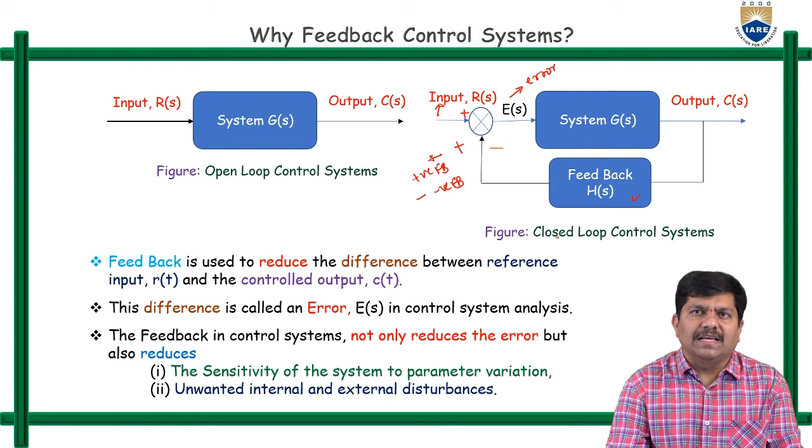So, what about the parameters that will be varied? The effect of parameter variations we can study in open loop control systems as well as in closed loop control systems. Similarly, sensitivity in open loop and closed loop control systems. Next is the effect of feedback on overall gain, effect of feedback on stability, effect of feedback on time constant of the control system. Last one is effect of feedback on disturbance. The disturbance could be an internal disturbance or external disturbances.

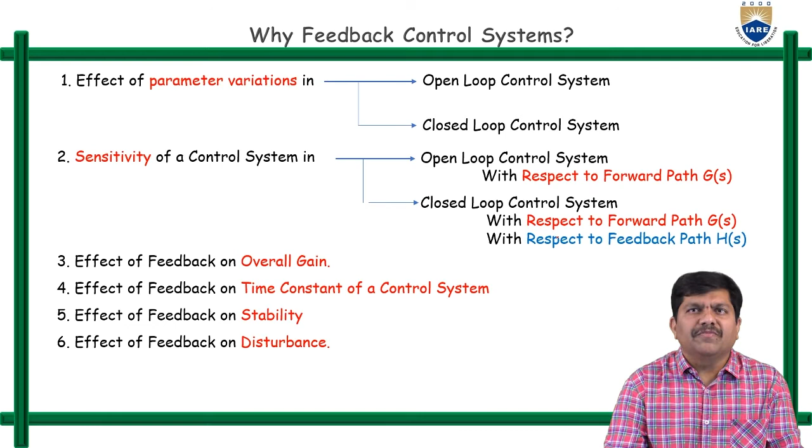These are the 6 important variations we can observe, and these are the 6 important parameters that will be affected once the feedback is connected. So if they are affected, how effectively will these 6 parameters be varied in closed loop control systems? So first, let us see the effect of parameter variations.

Now, we are going to discuss the effect of parameter variations, because if we do not talk about open loop control systems, then we cannot establish a perfect relation for the characteristics of the feedback system. Feedback is the section that separates open loop and closed loop systems. So let us examine these 6 parameters for open loop systems and closed loop systems. Once we do that, only then can we establish the perfect relation, and that is the effect of the feedback section on these 6 parameters.

So first one is parameter variations. What are the parameters that will be varied? We are going to examine that for open loop and closed loop systems. So first, let me examine the open loop control system. In the open loop control system, R of S is there and C of S is there. R of S is the input, and the forward path system transfer function is G of S. On the left side I am giving R of S, then G of S, and on the right side C of S.

Suppose, due to some internal disturbances or some parameter variation, take a transformer as an example of an electrical section. Because of variations in temperature, if it is kept during peak summer, the transformer has to withstand 53 or 54 degrees centigrade, based on geographical constraints. If the same transformer is placed in winter, it need not address that much temperature. So because of temperature variations, moisture, rainy conditions, or seashore conditions, so many constraints are there.

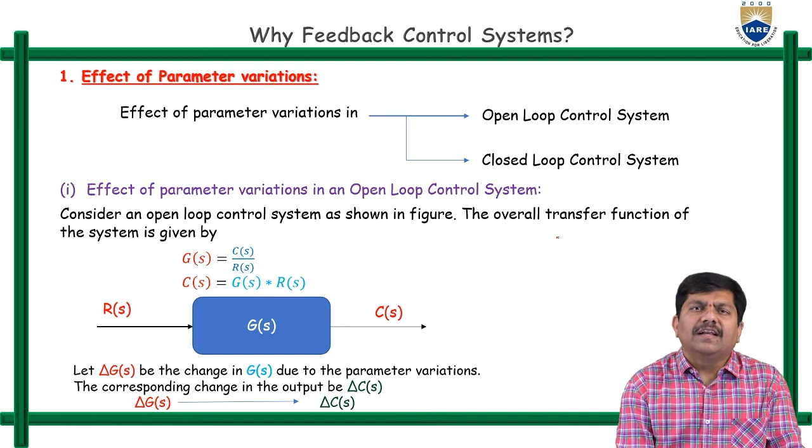Delta C of S is because of, not exactly proportional to, the parameter variations in the forward path transfer function, that is delta G of S. So that's what here we are clearly mentioning. Delta G of S will make the change in output as delta C of S.

So first, the effect of parameter variations can be observed as follows. We know that the Laplace transform of the output is nothing but the transfer function into the Laplace transform of the input. So let us make use of the same concept here. What could be the overall output once the parameter variations have taken place?

The output is C of S plus delta C of S, which is the transfer function, G of S plus delta G of S, into the input R of S, because the input won't change; the parameter variations have taken place in the system, not to the left side of the system. On the left side R of S will be there, but in the system it is G of S plus delta G of S. So only from that system onwards the parameter will be varied, and the corresponding consequences will change.

So the output will be changed from C of S to C of S plus delta C of S. C of S plus delta C of S is equal to G of S plus delta G of S into R of S. Simplifying that, C of S plus delta C of S is equal to G of S into R of S plus delta G of S into R of S. On both sides the common terms can be cancelled. The remaining one is delta C of S is equal to delta G of S into R of S. So what do you mean by that?

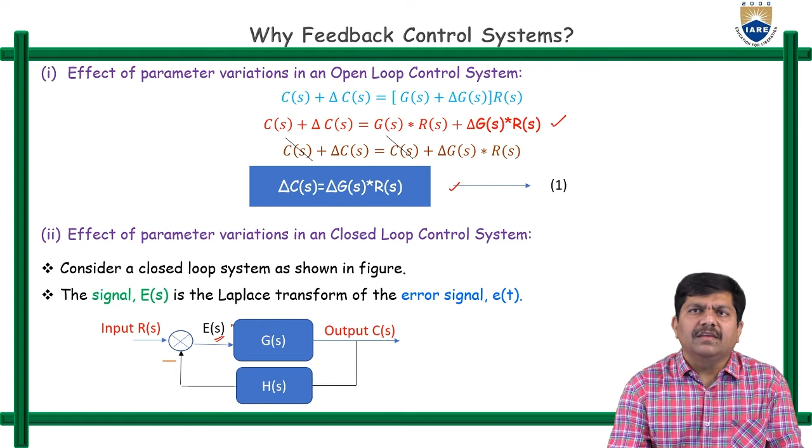The second one is the effect of parameter variations in a closed loop control system. Consider a closed loop system with G of S and H of S; the output is C of S and the input is R of S. The additional quantity here is the error, E of S. The overall transfer function of the system is given by C of S divided by R of S equal to G of S divided by 1 plus G of S into H of S.

This is the overall transfer function if the closed loop control system is assumed as a negative feedback control system. In the total analysis we are going to consider negative feedback control systems only. So in negative feedback control systems, the overall transfer function C of S to R of S is equal to G of S divided by 1 plus G of S into H of S.

So what are the variations? Let us introduce the variations in the forward path transfer function. So the proportional variation in the output is C(s) + ΔC(s) = [G(s) + ΔG(s)] / [1 + (G(s) + ΔG(s))H(s)] · R(s).

Wherever G(s) is there, G(s) + ΔG(s) we have to add. So finally C(s) + ΔC(s) = G(s) + ΔG(s) divided by 1 + G(s)H(s), and in the denominator, if we are simplifying, ΔG(s)H(s), into R(s). So this ΔG(s)H(s) is a very small value as compared to 1 + G(s)H(s). So as compared to this particular value,

now ΔG(s)H(s) could be ignored because ΔG(s) is a very small value, and if H(s) is multiplied, that value becomes further negligible. So in other words, to simplify our assumptions, ΔG(s)H(s) can be ignored. If it is ignored, then C(s) + ΔC(s) = [G(s) + ΔG(s)] / [1 + G(s)H(s)] · R(s).

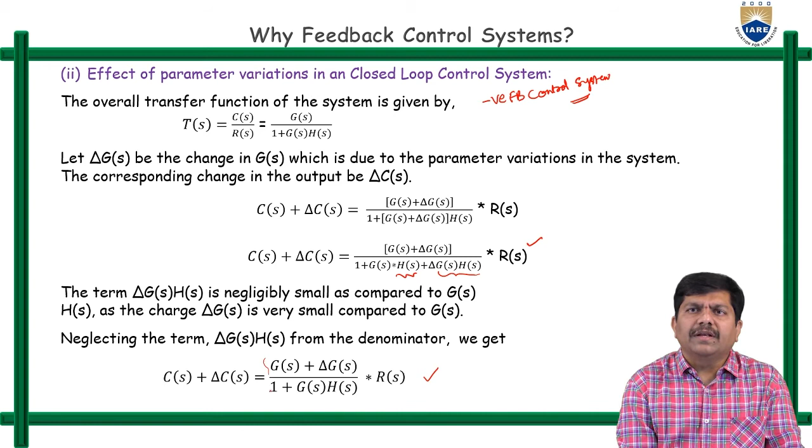So after ignoring this ΔG(s)H(s), the total expression can be reduced in a simplified manner, that is C(s) + ΔC(s) = [G(s) + ΔG(s)] / [1 + G(s)H(s)] · R(s). So again here, in the numerator G(s) + ΔG(s) is there. So you can separate G(s) as a separate term and ΔG(s) as a separate term. That's what we are doing here.

So C(s) + ΔC(s) = G(s) / [1 + G(s)H(s)] · R(s) + ΔG(s) / [1 + G(s)H(s)] · R(s). So this first value is finally actually the C(s) value. This is C(s) + ΔG(s) / [1 + G(s)H(s)] · R(s).

So on the left side and right side, there are some common terms. If you cancel that term, the left side is ΔC(s) = ΔG(s) / [1 + G(s)H(s)] · R(s). So this is the output corresponding to the internal variations, parameter variations, in the closed loop system.

In the open loop control systems, if you observe, ΔC(s) is just ΔG(s) · R(s). This is what happens in the open loop control systems. In the closed loop control system, the same ΔC(s) = ΔG(s) / [1 + G(s)H(s)] · R(s). So what do you mean by that? Closed loop variations equal open loop variations divided by 1 + G(s)H(s).

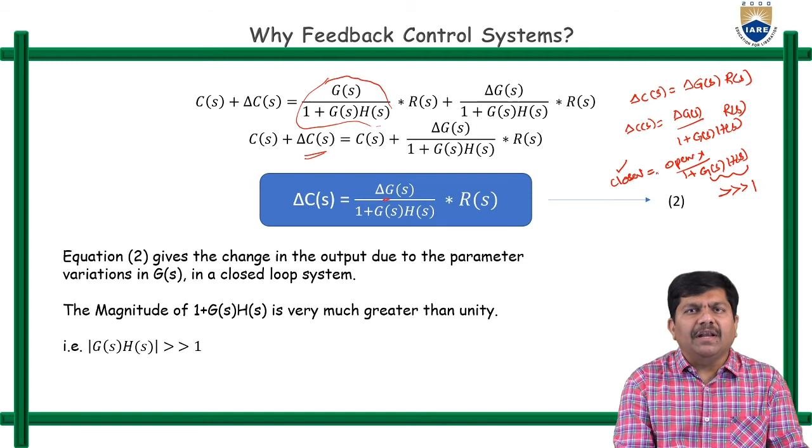So which one reduces the impact of variations in the output? No doubt it is the closed loop control system, because the open loop variation is divided by 1 + G(s)H(s). Generally G(s)H(s) is a positive value, certainly very much larger than 1. So open loop transfer function variations divided by a very large value gives the closed loop control system. So the impact of system variations on the output in the closed loop control system is very negligible. This is a better feature that the closed loop control system has.

Now here the observation is clearly just what we have described: delta C of S is equal to delta G of S into R of S in the open loop control system, and in the closed loop control system, delta C of S is equal to delta G of S by 1 plus G of S into H of S, into R of S.

From equations 1 and 2, in a closed loop system, due to feedback, the change in the output due to the parameter variations is reduced by a factor 1 plus G of S into H of S. In an open loop system, such a reduction does not exist due to the absence of feedback. So this is a very important observation, and this is the effect of the feedback component on closed loop control systems.

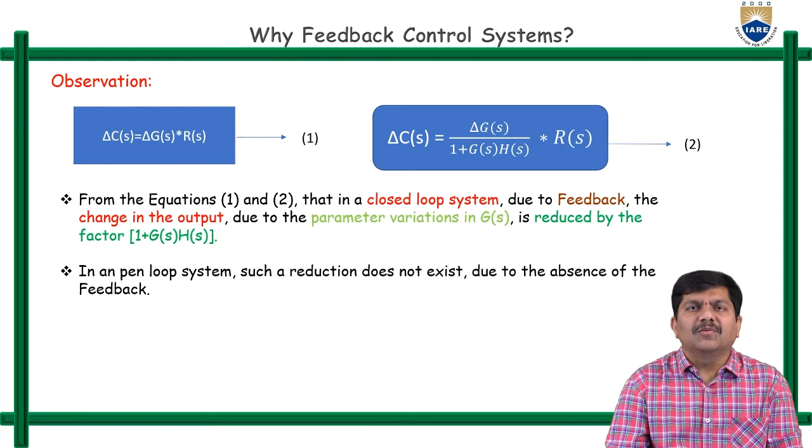Now, the second important quantity is the sensitivity of a control system. First, we should ask: should sensitivity be maximum or minimum for betterment of the system? Sensitivity should be minimum, because if the sensitivity is too high, for smaller deviations or smaller inputs the system behaves like anything. Is that property advisable for the healthy conditions of the system? No way.

So if the sensitivity is very high, such a property is not advisable for any existing system. Generally, sensitivity can be defined as percentage change in transfer function to the percentage change in any one of the parameters. The parameter with respect to which we want to assess the sensitivity of a transfer function should be in the denominator. Sensitivity cannot be defined for only a single parameter. Sensitivity means with respect to what? Because sensitivity can be defined in so many ways.

The system is so sensitive with respect to temperature, not that much sensitive with respect to moisture or some other conditions. So the relation between the two parameters is very important; only between two parameters can sensitivity be addressed. Sensitivity of what, with respect to whom? So sensitivity of the transfer function with respect to the system parameter, defined as percentage change in transfer function to percentage change in the parameter, which is K.

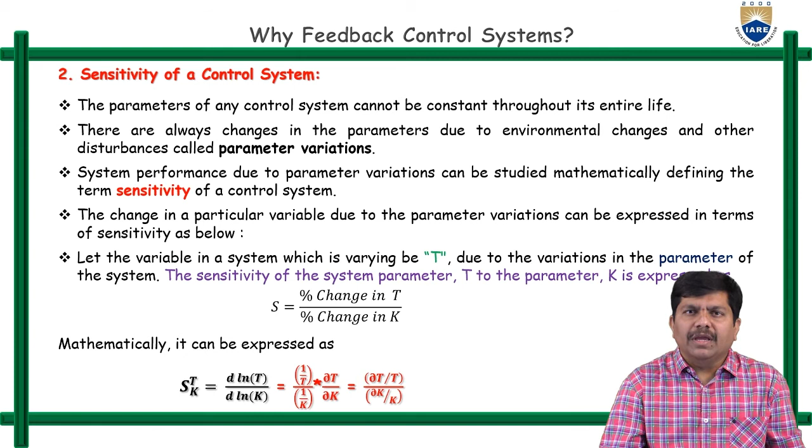Mathematically, percentage change in transfer function is dou T by T, the change in the transfer function divided by T. Why T in the denominator? Because it is a percentage, otherwise dou T is enough. Percentage change in K is dou K by K. Adjusting numerator and denominator, sensitivity can be represented as dou T by dou K into K by T. This is the introduction to sensitivity, and the representation S T K is also called the sensitivity function of a system.

Let T of S be the overall transfer function of a control system and the forward path transfer function G of S vary. If we want the relation between forward path transfer function and overall transfer function, the sensitivity is S T G. In the superscript we write the quantity whose effect we observe, and in the subscript G, the parameter we vary. So S T G is dou T of S by T of S divided by dou G of S by G of S.

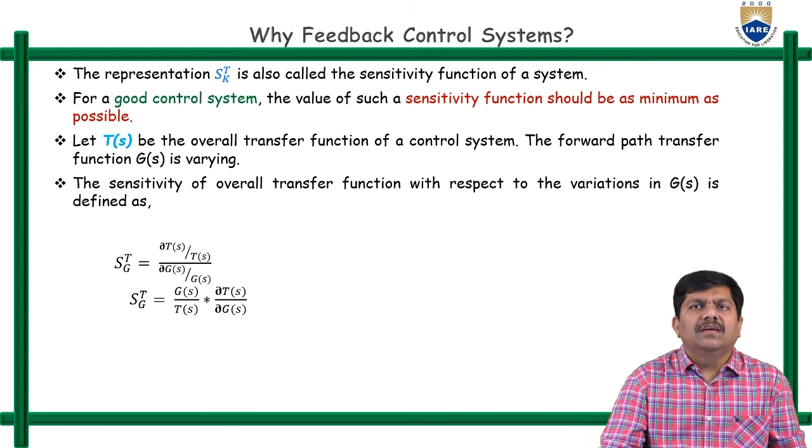If we are simplifying this equation, G to T into dou T by dou G. So for the open loop control system, let me calculate the transfer function. In the open loop control system, the overall transfer function is nothing but G of S only, because there is no feedback in the open loop control system. So in the open loop control system, T of S is nothing but the G of S value.

So what is the expression we have represented? STG is G of S to T of S into dou T of S by dou G of S. So T and G both will be same. So the sensitivity of overall transfer function with respect to the forward path variations in the open loop control system is 1. That is nothing but 100%.

100% means even for smaller deviations, the system will respond strongly. So it is 100% sensitive. That's the meaning of STG is equal to 1. The sensitivity of T of S with respect to G of S for the open loop system is unity. Now coming to the closed loop system, T of S equals G of S by 1 plus G of S into H of S.

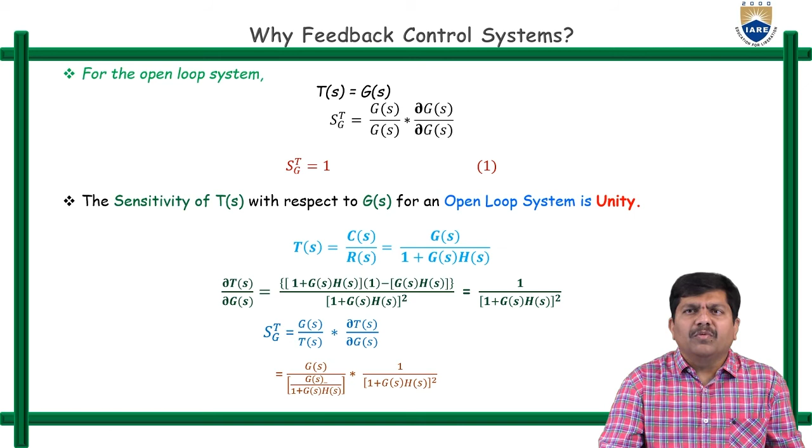Now if you want to calculate STG here, we are going to get STG is equal to 1 by 1 plus G of S into H of S. This is what happens in closed loop control systems. Is it 100%? No, 100% divided by 1 plus G of S into H of S. Now, which one is having low sensitivity? That is the closed loop control system.

Comparing equation 1 and 2, it can be observed that due to the feedback, the sensitivity function gets reduced by a factor 1 plus G of S into H of S as compared to the open loop system. Less the value of the sensitivity function, less sensitive is the system to variations in the forward path transfer function. So the impact of system parameter variations on the response is relatively less. That's why the sensitivity should be less for the betterment of the system.

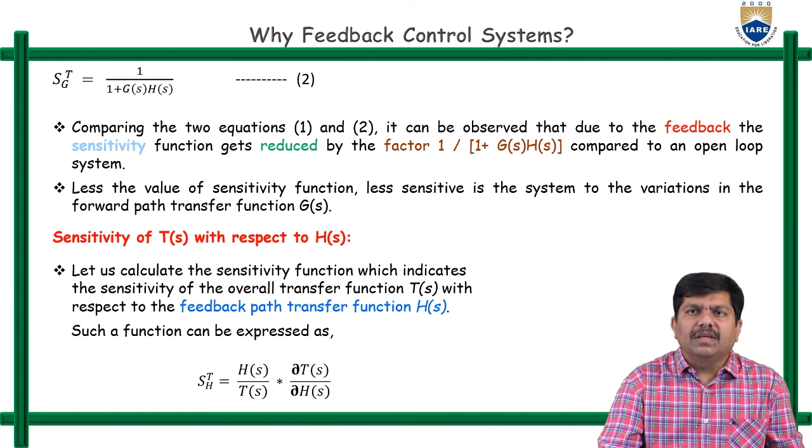In addition to the forward path variation, we may get one more doubt: variations may also happen in the feedback path of closed loop control systems. So let us examine the effect of variations in H of S on the overall transfer function, which is the sensitivity STH, subscript H, superscript T. STH is nothing but H of S to T of S into dou T by dou H.

Now let us take the first order differentiation of the overall transfer function with respect to H. Finally, STH is minus G of S into H of S divided by 1 plus G of S into H of S. That is equation number 3. Here the value is negative. From equations 2 and 3, it can be observed that the closed loop system is more sensitive to variations in the feedback path parameters than to variations in the forward path parameters.

This is a very important characteristic. Even for smaller variations in the feedback path, that is not at all advisable. Because we are getting negative, much deviation may be there. So you have to keenly protect the feedback path in order to maintain the betterment of any control system. So these are the sensitivity calculations and parameter variations. I think it is very clear.